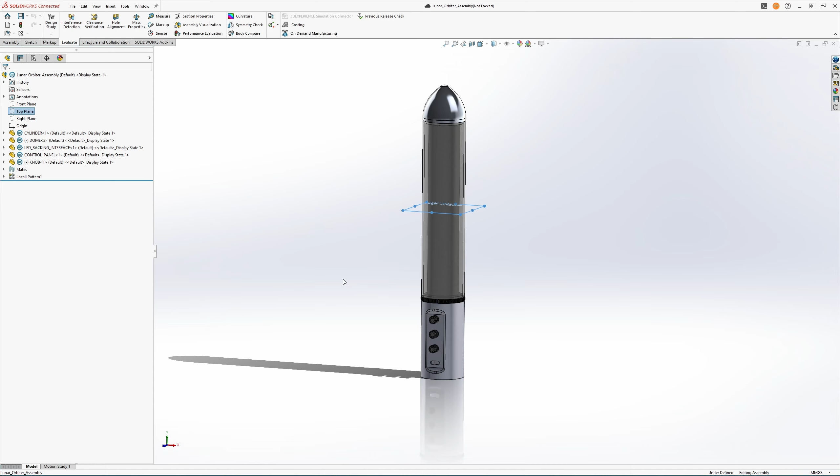All right, we're back in the project, and one of the first things to do before we go any further is just to make a sense of scale. We talked about this in the first video, but we didn't really do anything until now. Basically what I mean is we need to dimension our whole assembly to something that we expect in the real world. So we said that we're gonna do something like a 185 in diameter cylinder and about 300 tall. Let me just show you how to do that.

We simply just create a new part here, and let's just do it on the top plane. We want it to be about 185 - this is just like whatever you think that it should be. And let me just say midplane, should be about 300 millimeters tall, let's say. So this is what I would expect that the lamp should fit inside this volume, kind of. I'll just close that, and then I'll just rename this space envelope.

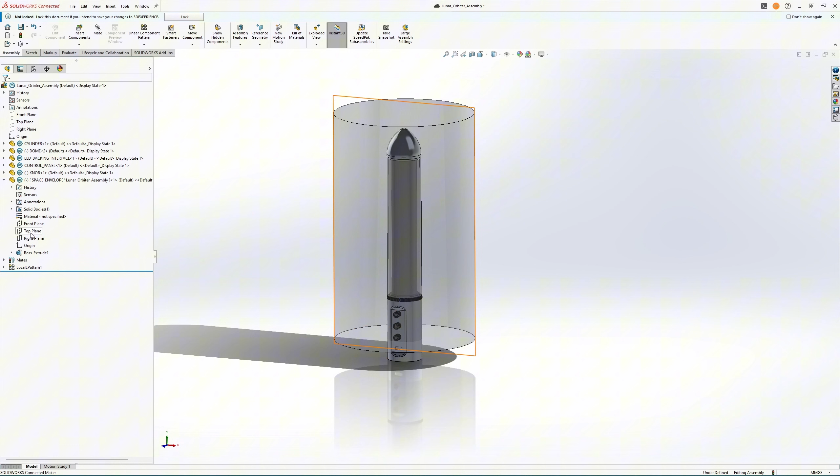So this is just like a visual guide for ourselves to say this is what we're designing for. It should fit within this. And we can see now already that it's probably going to be too tall, but let's try to just move this around a little bit so it fits, let's say there, there, and let's just move it about to there. So we can already see now that it's going to be too tall.

So let's just try to hide this for a second, and let's adjust this. Let's say instead of 185, let's just try 165, 155, something like that. So we took off about 30 millimeters, and we'll just do the same for this part. Here you can just write minus 30. So now we've adjusted that, and this is a good way to adjust your parts in the assembly context. You can make it a rough dimension, and then you can always fine tune it to your final design.

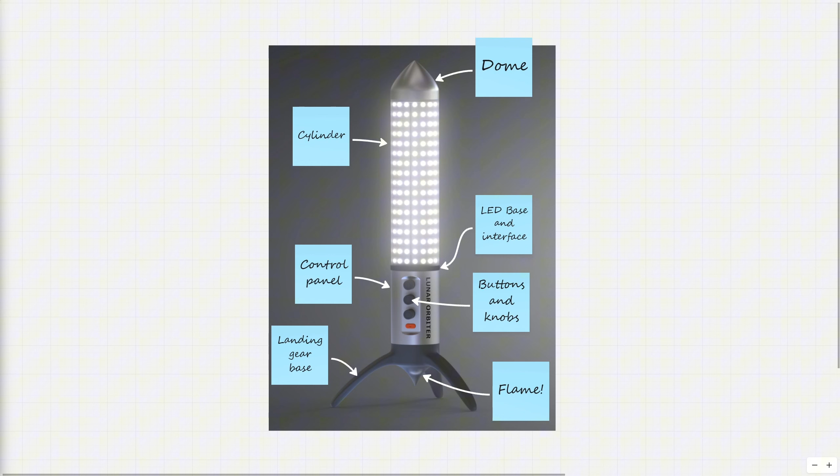All right, so now let's move on to designing the landing gear and the flame. Before we get into designing it, let's just have a quick look at how we would draw this up. Obviously I've drawn this already, but in your case, you might be designing a new product and you have a sketch or something like that. So try to just do a few sketches until you're kind of happy with where the design is going.

So for this one, let's try to analyze it for a second. We have a round part, and it has 3 legs, and it has kind of a shape that's repeated around the circumference of the part. If you were to take a cross section of this part that goes straight through one of the legs, you can see that it goes down, then you have a sharp point and it goes up again. You have some sort of curve, comes down, and it meets some sort of flat point which sits on the ground, and then some sort of flat point that goes up, and another curve goes up, and it meets the kind of cylindrical shape up here.

And our flame, we want it to be part of this part in a way. This is one way to show you how to do split parts, so we'll get back to that later. So let's get into it. All right, so we've created a new part here, and let's start with sketching on the front plane.

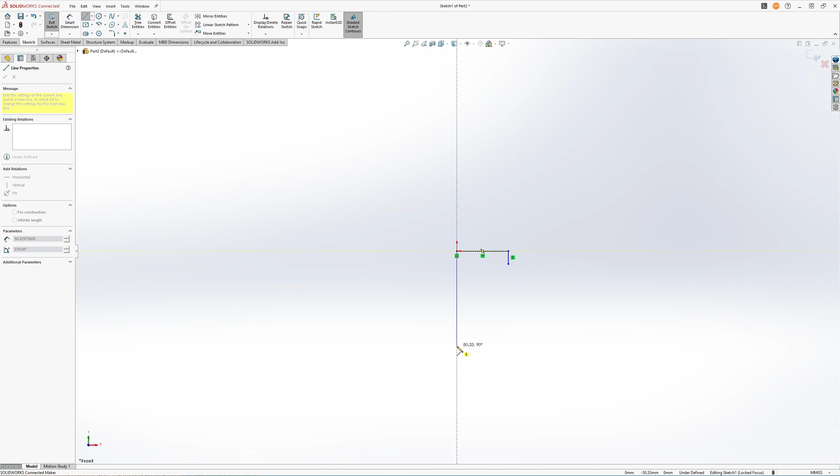So we know that we have some sort of round shape, a diameter, and we also know that it needs to go down into like a point where the flame is in a way. We also know that we want a flat part out here on the table and a flat part that goes up. So something like that. And SolidWorks, when you just draw like this, it doesn't have a sense of scale.

So the first time you put a dimension on it, it'll actually scale all the other stuff, and that can be quite useful. We said that the diameter of it should be about 185. So we'll take this one and say the radius would be half of the diameter, like that. So now you couldn't really see what happened, but it actually scaled all of the rest according to the dimension you just put in.

Let's put a few dimensions. This, let's say 3, and let's say 2. And let's say this should be the dimension from where it kind of interfaces with the other part, and the floor should be about 65, let's say. And then let's say up here we should have about 10 millimeters of part that comes down from the other part. And let's say that the diameter of this up here, I think we said 45 was the diameter, so we'll say like that.

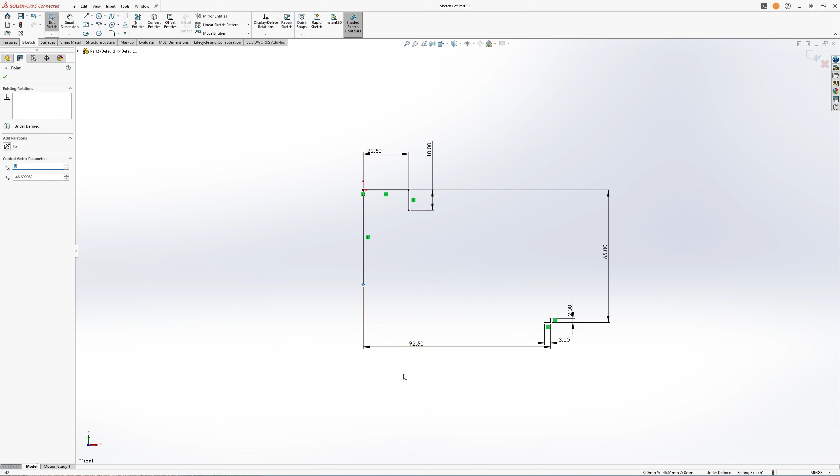And now we only have one point here that's not defined, but we need to have some sort of curve coming over here. So let's try to just use a spline, directly like this. So splines work as a line with some control handles, which you can move like this.

For this control handle, I wanted it to kind of come down and meet this line. So let's click on that and click on this control handle, and we'll say that these should be collinear. And then it's way too curved here, so we'll wind that all the way down like that. It doesn't have to be accurate—you can play with this later as well. Let's say something like that.

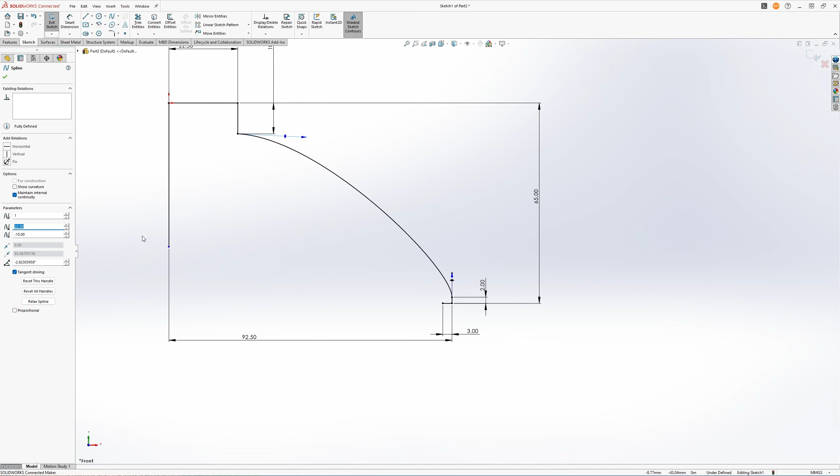And let's say this one has to go up first somehow and come down here like that. Actually, I'll just delete this point here and we'll just remove the handle instead. So something like this.

So I don't know if you can start to imagine it. If this is our rotation axis, this will be kind of like the leg shape.

Something like this. So again, we can just have a ballpark for now and then we'll come back to that later. Let's say about 50 for there. And you notice the handles here are still blue, and that's okay because you can adjust them and it's kind of hard to define. You can define it with the length and stuff, but it will be kind of arbitrary.

So I find that when you work with curves that are hard to define like this, you kind of just visually look at the shape and adjust. If you're working on a project where you really want to define it precisely, I would use a style spline, because you can then adjust the length and the dimensions of these guide lines. But yeah.

All right, so now let's try to revolve this. So now it found a line, but it's not the right line. Let's say we want this instead. Okay, so now we have like some weird kind of shape, right? But we can use this.

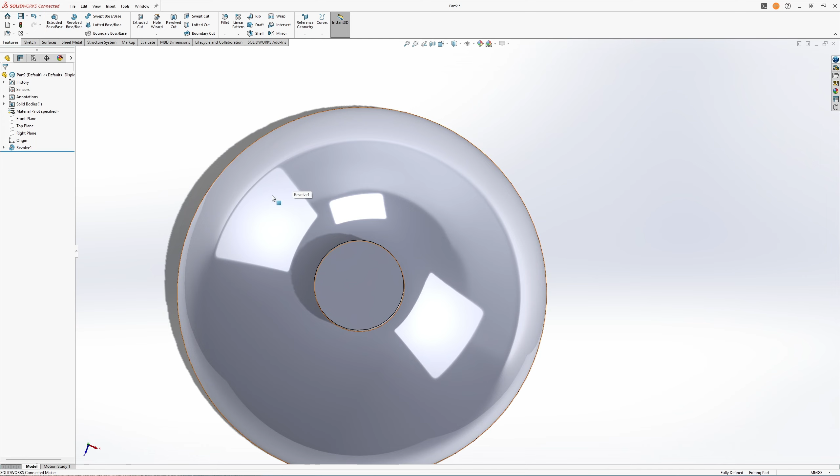And we only wanted 3 legs, so we can do a cutout for the rest of the material we don't need.

So let's try to sketch on our top plane here. I want the end of my foot to be kind of round, like this in a way. And we'll try to draw in the shape of the foot as seen from above.

We'll also use this center geometry as a guide. So we'll say that this should be co-radial with this. And let's use a spline for this here.

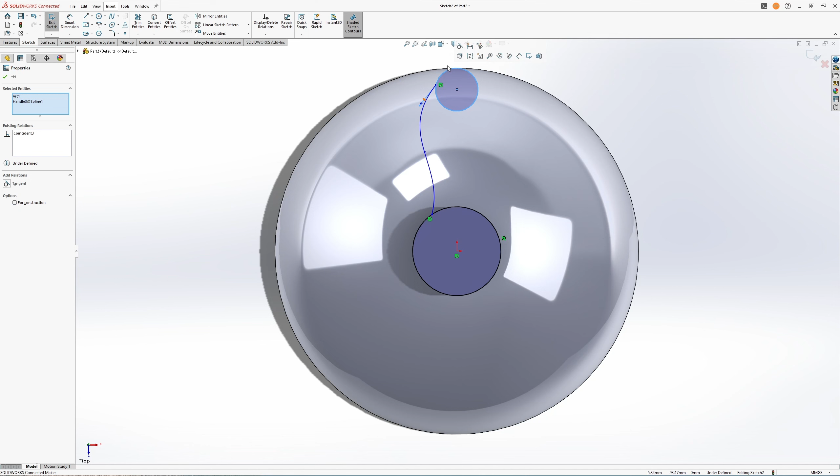We'll say something like this. And this handle here, we want that to be tangential to this. You see this snapped away from this, but we actually want this to be in contact with the outer radius—the diameter, sorry. So co-radial—nope, that's not it. We want it to be tangential.

Now it's starting to get messy, and that's because we're not controlling it properly yet. So we need to have some sort of control on this circle up here. I'll use a center line and get that into the center there, and we'll say that's vertical. And let's also give this a dimension so it knows—let's say 10. Yeah, it doesn't have to be much, just like that is fine.

And then let's say this handle should be something like this. Maybe let's try to just make it vertical. Yeah, that's all right. And then we'll mirror this one to the other side.

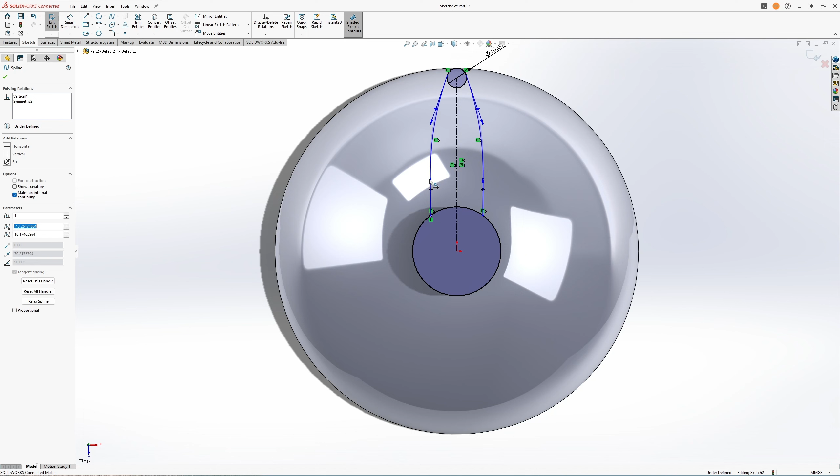This, and now I can kind of start to see the shape of it. I think it's looking a little bit wide for now. Say something like this, maybe something like that, a little bit sharp. And now we see we don't need these parts of the circle, so we can trim that away.

And then we also, so actually before we, yeah, let's try to copy this around because we wanted 3 legs, right? And let's try to do a circular pattern and 3. So now you can start to see that it looks like something.

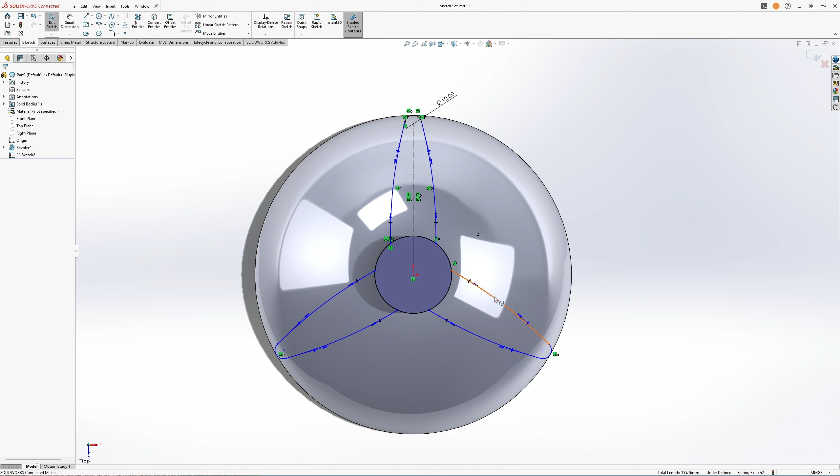Let's click OK. And let's try to imagine we're cutting away material, but we want to cut the material that's not within the envelope of the shape, right? We don't have an enclosed shape just yet because we have a line that kind of goes through here. So let's try to remove that.

Let's try to remove this. Trim it, trim it, trim it. And now you see you have an enclosed shape because it changes color to blue. And let's try to now do our extrude cut.

So let's try to go through all, and this is kind of opposite of what we want. So we'll do a flip side cut. And okay, so there we have it. That's the basic shape of our foot.

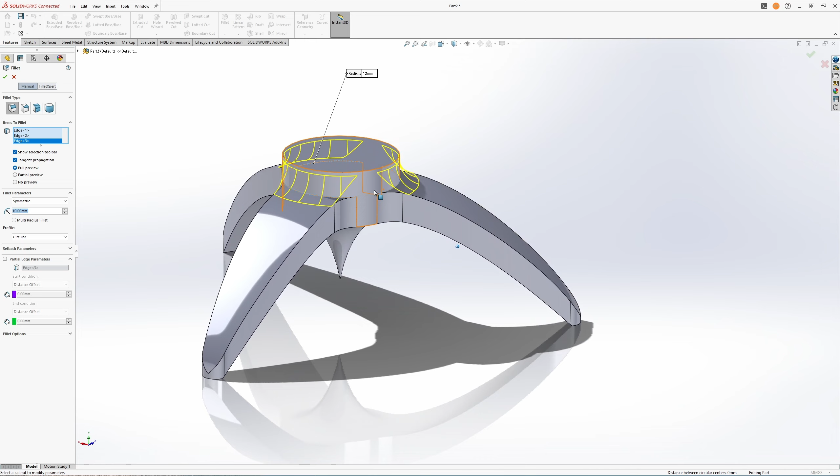And now let's try to clean it up a little bit. So we can put in some fillets here. Let's also try to build in some fillets here. I don't mind these being fairly big, so it kind of blends in with the other geometry.

And let's try to see if we just select the face here and select a small radius. It'll select all of the adjacent edges. Oops. If you find that it kind of selects lines in the back, what you can do is you can hold in Shift, and then it'll force it to select whatever's in front. That's a good tool sometimes, if you have a lot of lines in the back.

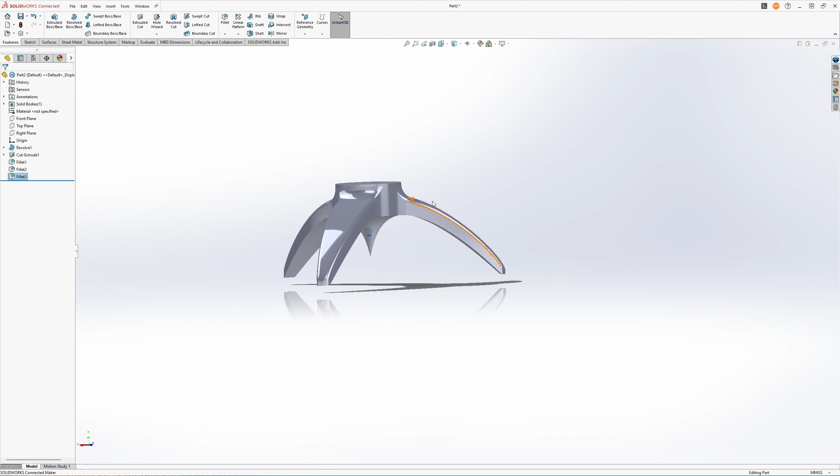So just change that to 3. Now let's try to turn off this so we can see. So it's starting to look all right, but I don't know, it's a little bit kind of not so natural, the shape there, I would say.

And one way to kind of analyze that is, let's go back to the sketch here. And let's go to this curve, show curvature. So here, this is a good little tool to kind of tell you what's the actual curvature of this spline is doing, or what is it? Yeah, so you see like it gets sharp when there's a very abrupt change in curvature, and we want it kind of to be smooth.

So do something like this. Can also, something like that. Not sure, like that. But yeah, that's one way to play with it as well. Something like that.

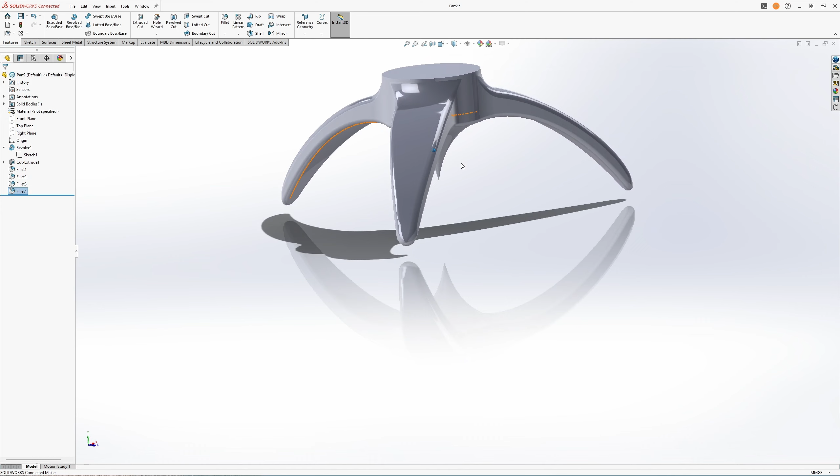All right, let's try to also get these down here. You see it kind of breaks our little flat bit out here, but that's okay because it still touches the ground at that point we want. And we're getting a smooth kind of rounded edge there. So this is starting to look all right, I think.

Now this point is very sharp, and that's probably going to be very hard to produce. So let's try to smooth that out a little bit. Let's say we want like some sort of a radius here, but should be small.

So let's just delete this one for now again. Let's backtrack a little bit. Let's say it should come down, meet a tiny little circle, maybe just 1 millimeter, maybe 2, 1.5, something like this.

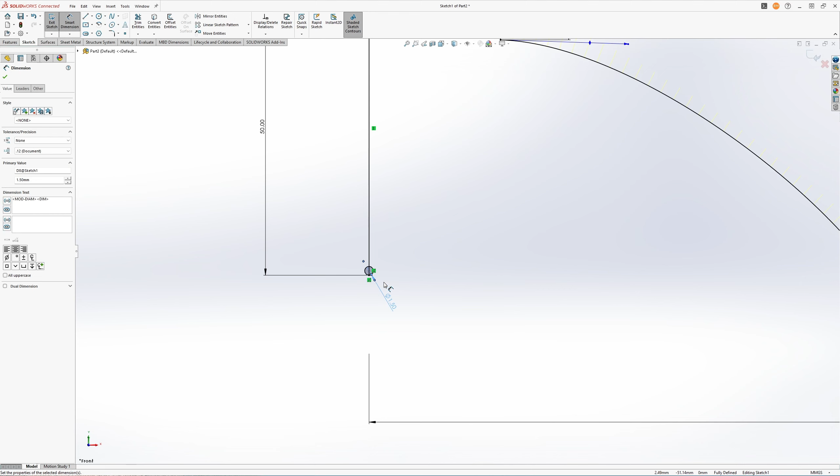Let's try to use the spline again. Come over here and make this one now tangent to this. And let's try to delete this one, get a more natural flow of the curve. Something like this. And now let's try to delete the stuff we don't need. Something like this, right? So now it comes down and joins like a more smooth kind of circle.

And that's going to be easier for the tool to actually do. Now we got an error because we changed this, we changed the lower surface, and now it can't find that surface anymore that we referenced. So let's just fix that. Let's clear that. Select it again. And there we go.

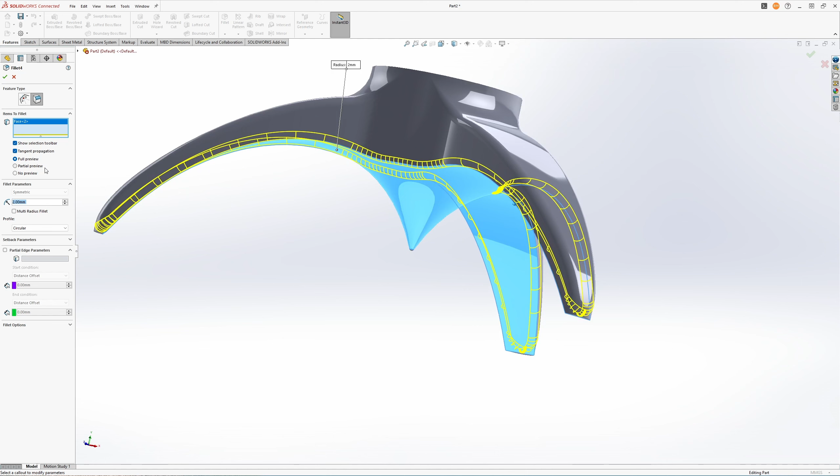Now it's not as sharp there. So let's just proceed to save this before we go any further. Okay, now let's proceed to bringing in our landing gear here into assembly.

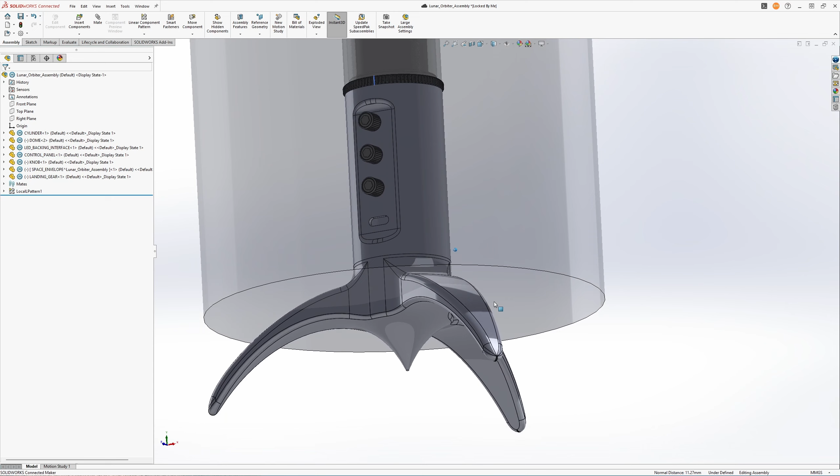Let's say this has to be made concentric to this. And we want this surface to match here. And let's just make this parallel to the front plane so that now it's fully defined. You can see already the lamp is getting too big, but we'll adjust that in a second. For now, we'll just hide this.

Another way you can hide it, other than just going up here, is to just hover your mouse over it and click tab, and that hides it. And if you click shift and tab, it'll bring it back. So it's also a good way to work with your model if you're trying to just look through it.

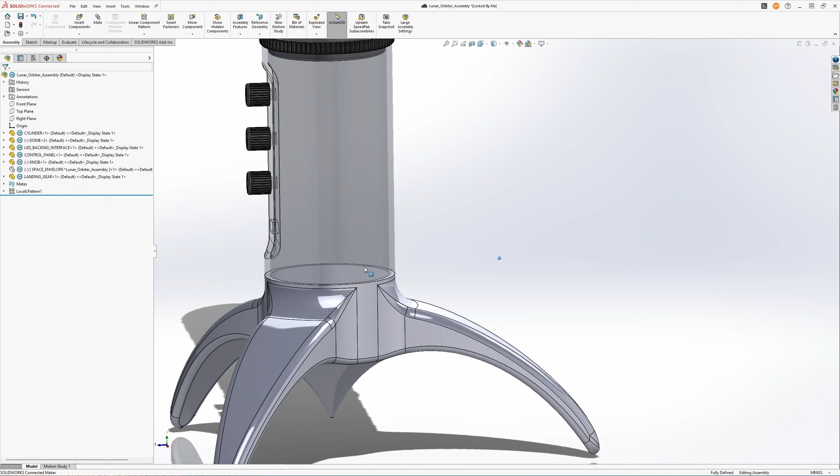Okay, so let's have a look at how this part would interface with the next part. You can change the transparency here, and now you can look through it. And we said we wanted to have something like a press fit kind of thing that comes up and fits into this kind of cavity. So let's try to draw that up. Let's go back into the part. And let's just make a center line first. And let's try to create that.

So we know that the wall thickness of the other part was about 2, I think. So let's say it should be about 2.1 here, just to leave a little bit of space for the parts to actually fit together. And let's try to do something like 2 O-rings that sit around this and it fits up into the other part. So I'll just need a little bit more space for that.

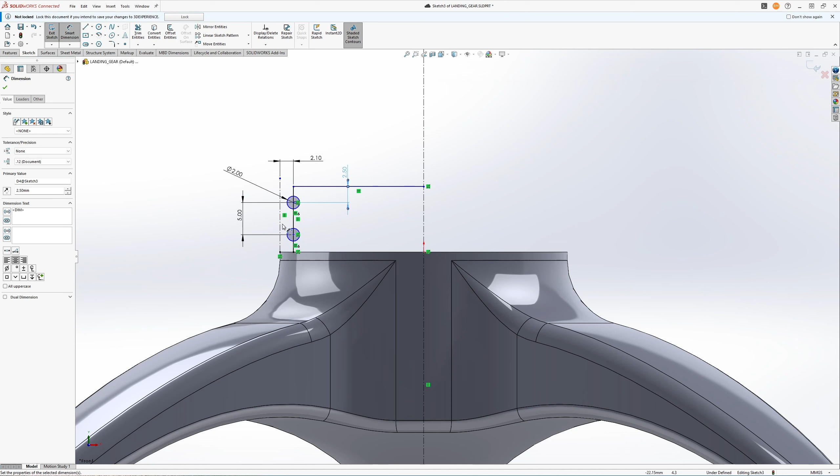Let's say we have something like 2 O-rings sitting there, right? And let's say a diameter of 2. Let's make them equal. And now let's say the distance between them should be, let's say 5. And let's try to find a distance from the edge here, say 2.5. And let's try to define a height here also. About that. And we just need a groove for the O-ring to kind of sit inside.

But actually looking at it now, this wouldn't really fit right because it would be too much interference with the part here. Let's try to redraw it. So I'll bring them back a bit. Let's say the O-rings would be 2 in diameter, so we'll just do 2.1. Our wall is at 2 exactly in thickness here. So we get about this much kind of interference, and that looks about right for the O-ring. So let's do that here, 0.85.

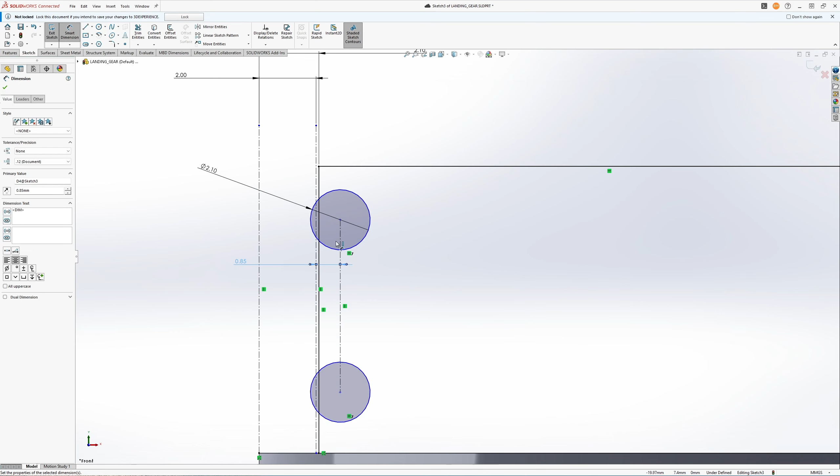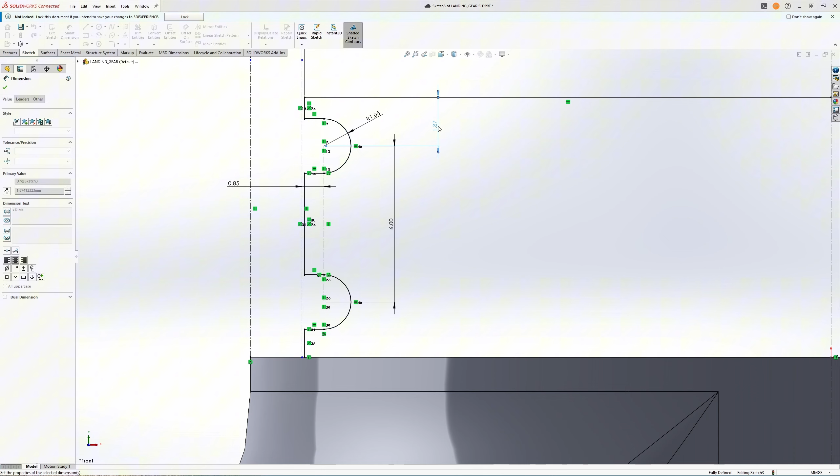And now we want a groove for the O-ring to sit into. So let's draw that groove. And there we have a groove for the O-ring. Let's do the same for this one. And you can see that they're blue, so something is missing. It's because it's lost the dimension we gave it because we cut that out. And we'll just make these two equal. Let's see what else is missing. So it's missing a distance between them. Let's say 6, and let's say that this has to be about 2 from the top. And so now they're fully defined, as you can see.

And to make it easier to have the O-rings come in there, we'll just remove these sharp corners here. And probably about half is enough. You can see how much it is if you change it up here. I assume that this part is 3D printed, so anything like this is easy enough to make.

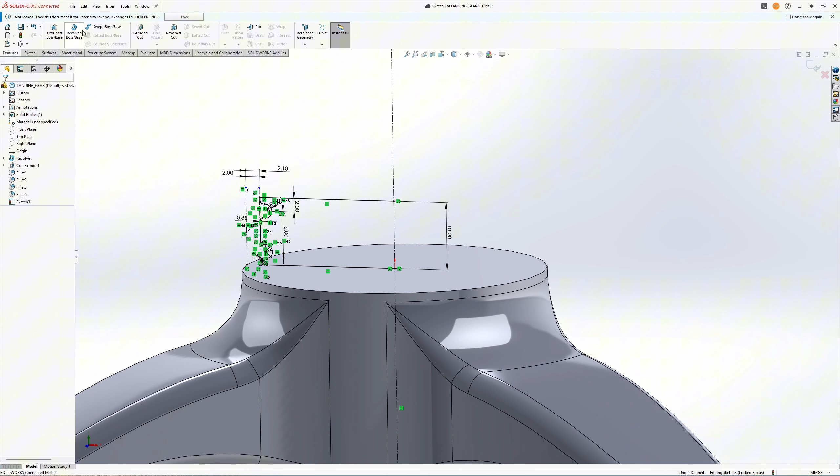So like that, and we still need a line in the bottom to our center of rotation. And now let's try to revolve that. And we'll select this axis. So there we have an interface with O-ring grooves. Round off this top as well. 5 is enough.

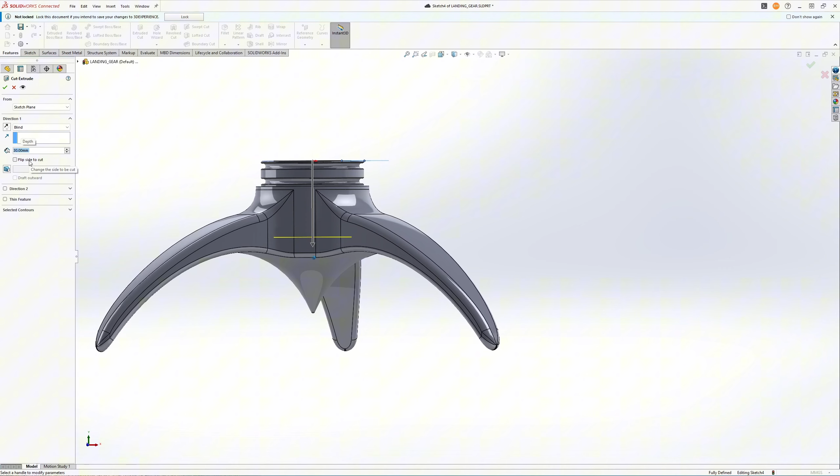And this is obviously still solid, and we want to cut away a little bit of the weight here, but we want this down here to be our flame part in a clear plastic. Let's first try to remove a little bit of material just for weight reduction. Say 30 is fine. Actually, instead of doing that, we'll just say that it should be some distance from the edge there. And let's say 30. Yeah, 30 is about fine. And let's just try to put a chamfer there. So now we've cut out a bit of the material, and it starts to look a bit nicer.

I'll just put it there. One way to look inside is to go up here and see it like that. So a part like this should be able to be 3D printed very easily. And let's try to change the material. Something like that. I'll just save it.

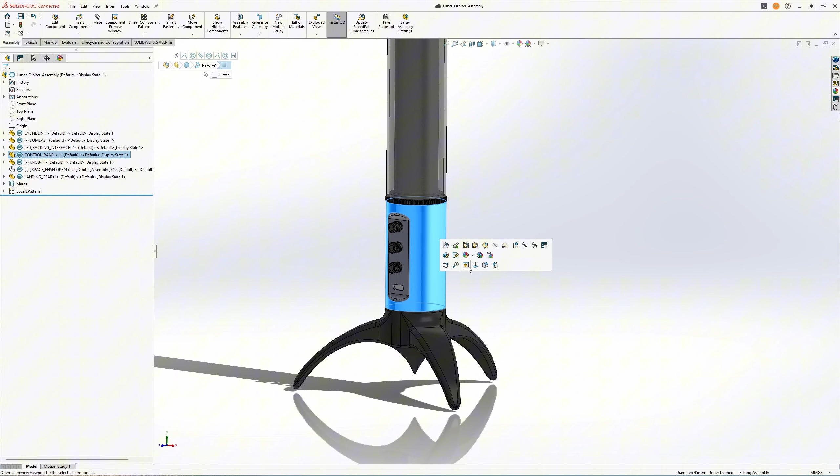Okay, now we are back in the assembly, and let's have a look at how this looks. So yeah, it looks pretty good, but we have some interference here, as you can see. So we need to make a few adjustments to our model overall. If we bring this back, you can see that it's too tall compared to what we wanted. So we have a few options. We could make the landing gear lower, but I kind of like that it hovers like this.

We could make the control panel lower, but it would kind of compress the buttons and make it a little bit more difficult. But I think there's room to compress it a little, so let's have a look at that. And then of course we can compress our LED panel, and that's just a trade-off. So you have less LEDs, but I think that'll be all right as well.

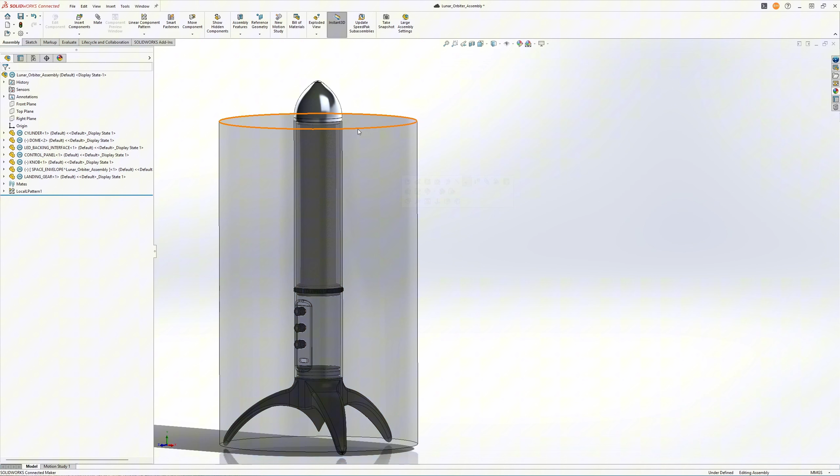And we can make this one shallow as well. And I think we could maybe take a little off, but it kind of looks nice as it is there as well. So let's try to start with the LEDs. So let's hide this. And let's try to go down to 135. I think we took 20 off there. And let's try to go into the other one again. Took 20 off.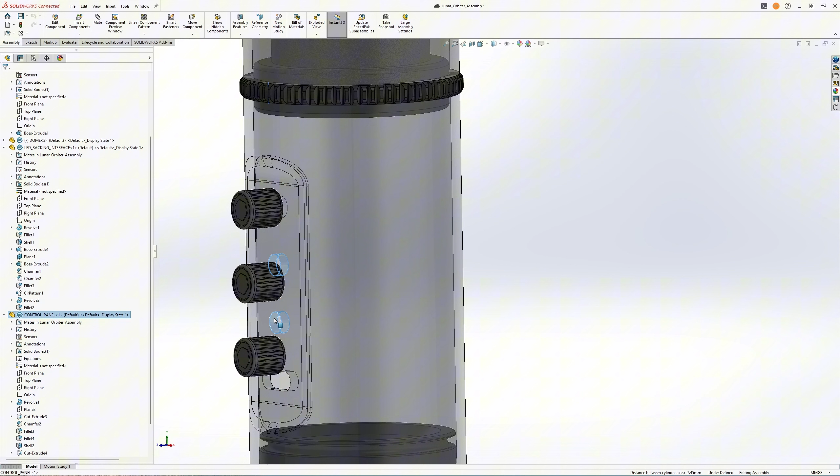I think that looks all right. And now let's try to reduce this. That's not gonna work. Let's try 55 actually. We just need to fix our pattern mate here. So let's just get the dimension of this. That's now 12. Oops. Collapse that. So that's actually acceptable, I would say.

And now we also can fit in the bottom there. Let's see how that looks now. So we still have a ways to go. So at this point, it's kind of a trade-off between the initial guess or how we would like the lamp to look like. And I would say it doesn't really matter that it's a little bit taller. I think I would rather have it a little bit taller and look well proportioned. So let's say that we keep it like this.

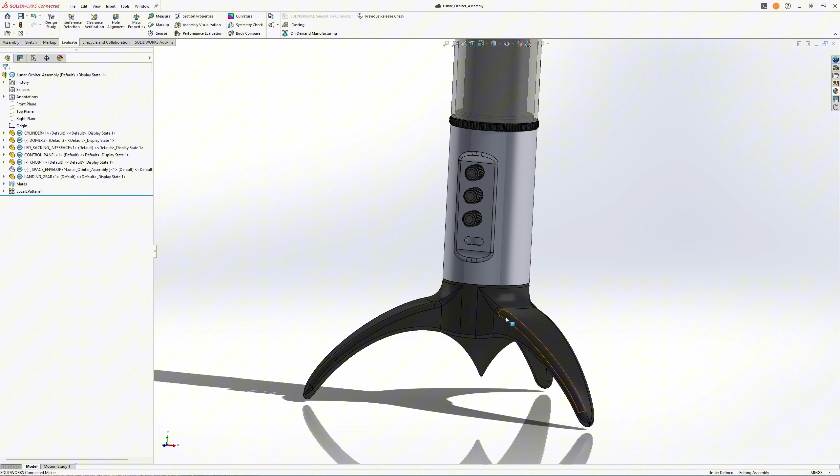Now let's try to move on to split parts. So split part is when you have a part like this, but you want to actually split it into two parts. And in this case, we were saying that we want to have the bottom be like a clear plastic so that we can have an LED inside that shines through and it'll look like a little flame. So let's try to do that. Let's move into this part.

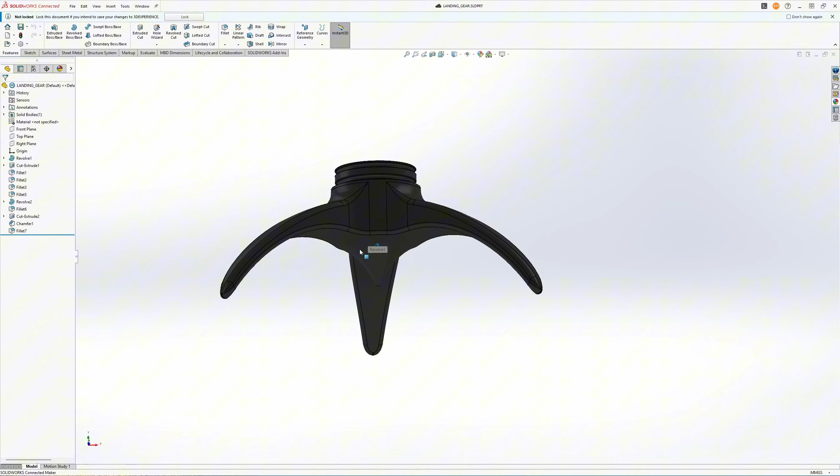And split parts you find up here in features, split, and it requires a drawing or sketch to work. So you basically can think of it like a knife that you cut through the part with. So let's try to think about this. We wanted to kind of cut through from above in a circle. So that's exactly what you do. We just move to the top plane here and let's draw a circle. Let's say we actually want it to be the same as this circle we cut here, so that later we can glue it in place.

Radial. And I'm kind of regretting the fillet I made there, so I'll just go back and change that because that's gonna make a funny geometry when we split the part. So by clicking twice, kind of slowly, you can rename it. Split line. And let's click on that and then click Insert, Features, Split, and Cut Part.

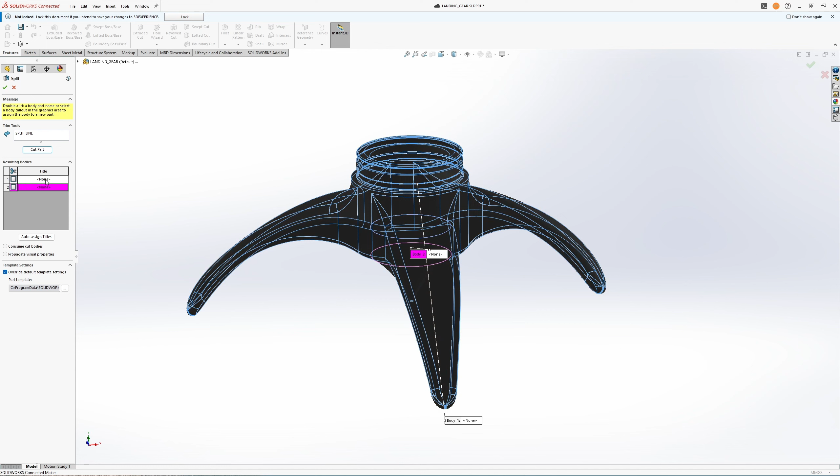And it'll come up like this and it'll show you where it's found potential split lines. And I would say that's about what we want. We want the bottom to be clear plastic here and the rest to not be. So let's say we want both of these. And this one, rename it the flame. And this one we'll rename, let's say, base. And then just click OK, and it'll go through and save those parts.

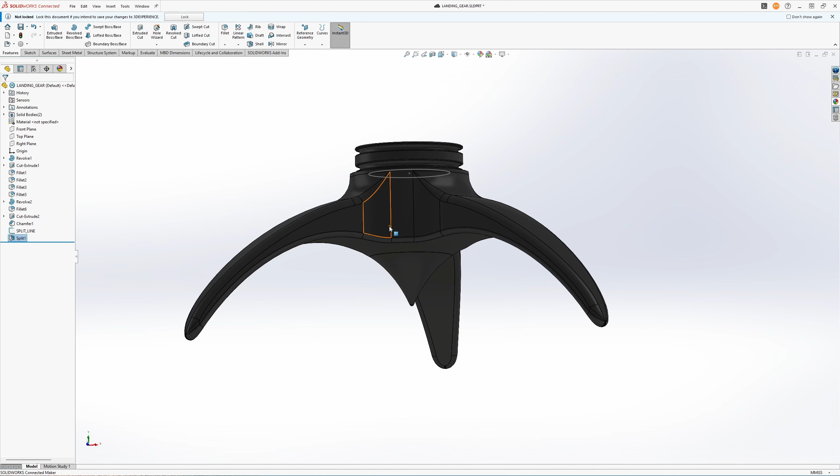And so when you make a split part, it'll create new physical parts, which are derived from a master part, so to speak. And it might ask you which unit of measure do you want to use. Just click yes, but you can change that later. So now we have it. So this has now become our master part. And now we have two sub parts. So let me just hide this and let's go back to our assembly.

All right, so just between takes here, I've already gone ahead and drawn up this button, and I'll leave that for you as an exercise to do. You should be able to do that by now. It might be a little bit difficult, but try to take your time and walk through the features and see if you can do it. I will show you quickly what the steps are, but try and go ahead and do it yourself. Extrude, fillet, and you can pause the video if you need to.

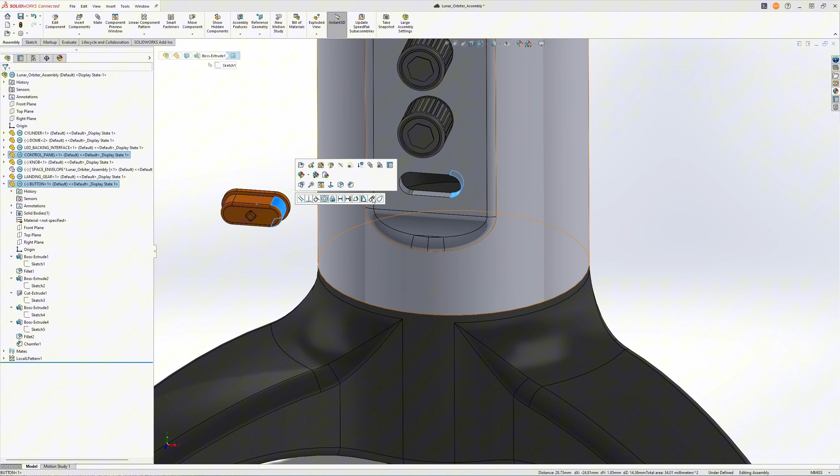All right, so let me show you how this mates. So you can do an elongated hole mate as well. If you go in here, select these two, start it there. And now let's say we actually want this to be moving in and out. Let me just correct this actually. Instead of a slot, we'll just say that it's concentric there and concentric here.

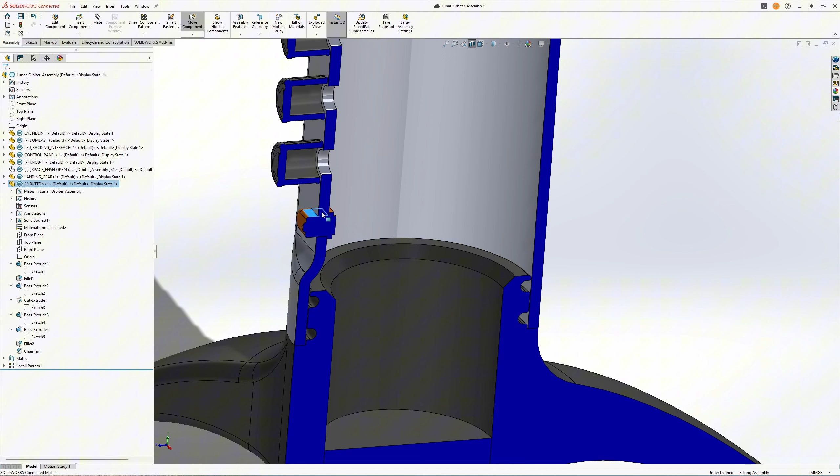And now we want this button to be able to be pushed in and out. So we want it to move kind of like this at a range. And you can do that with the advanced mates. So select the surface in here, select the surface, and then over here you can say a limit distance. And we say the smallest distance it can be is 0. And let's say we have an actuation length of 1.

Click OK. And now when you try to move it, you see it can only move 1 millimeter. So that's kind of how it will be in real life. And this helps you analyze how the parts will move in real life and if there's any conflicts with other parts and so on.

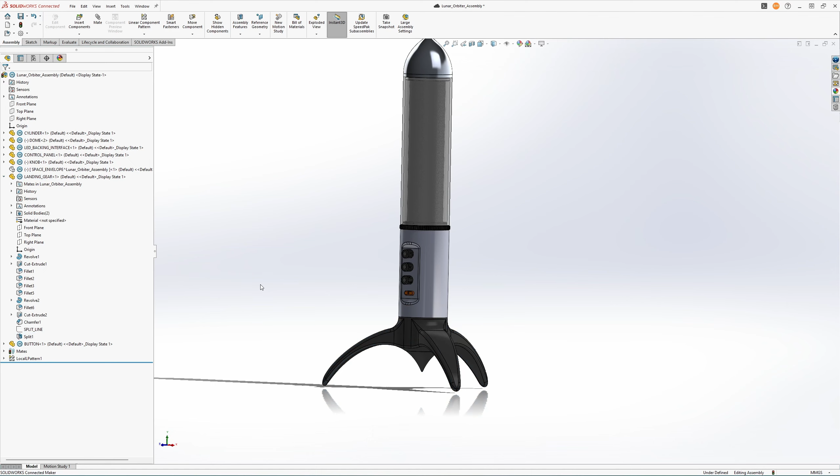Now let's talk about configurations. So we just made a foot with two parts in it. So we have a clear plastic part and we have a normal plastic part. So the part we have in here now is actually our master. This is the one that we split. Now we have the two new parts we want to put in here. But let's say we have two models of this lamp. We have one which has the flame, the clear plastic, and we have another one which has another foot, for instance. Or we have another one that has different colors or different dimensions altogether. You can handle that with configurations.

So let's say this is our no flame version. So you go up here in configuration, and these are the different configurations. So you can have master configurations and you can have child configurations. So let's say you have a configuration which has a certain color, but that one has a different landing gear or so on. You can kind of make them related to each other in this way. But here we'll just say it's completely new because it'll have a different foot. So we'll say with the flame. Okay. We can go in here and say okay.

So configurations work with states of the part. So if you have it suppressed or you change the material, stuff like that. So let's try to put in our new foot here. So this is the one with the flame. And we say we don't want this one to be in this one. So we'll suppress that. And you can't delete it because it's still needed in the other configuration. So let's go have a look at the other one now. So in this configuration, it's not suppressed. But if we go back to our flame, it is suppressed.

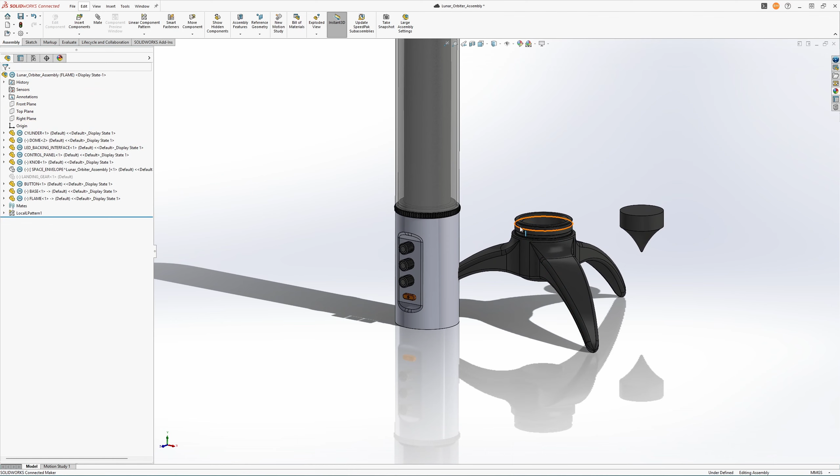And now let's insert our landing gear. Oh, sorry, base and flame. I'll just put them here. And we'll give it the same mates as before. Concentric. The surface mates with the surface. And we'll just say that this is front plane to front plane. And this one. So you have multiple options here. Because this part is derived from this part, they will have the same origin. This origin and this origin. So you can just mate those two origins in this case, and it'll come back to that.

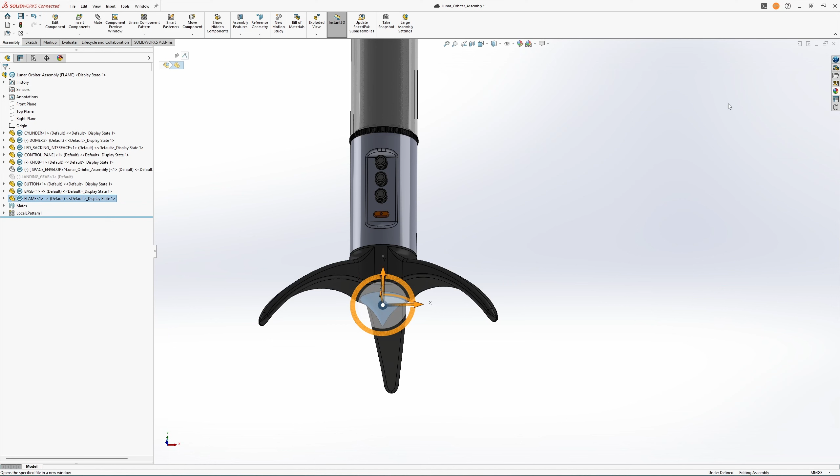And now let's go try to change our flame to a clear plastic. Clear, let's say it's frosted. And now let's go back to our other configuration. So in here, it actually inserted these new parts, but we don't want those in this configuration, so you can suppress those. And now when we swap between these configurations, you'll see it looks more or less the same, but actually it suppressed the landing gear in this one. And in this one, it suppressed these two new parts we put in. So that's how you can work with configurations.

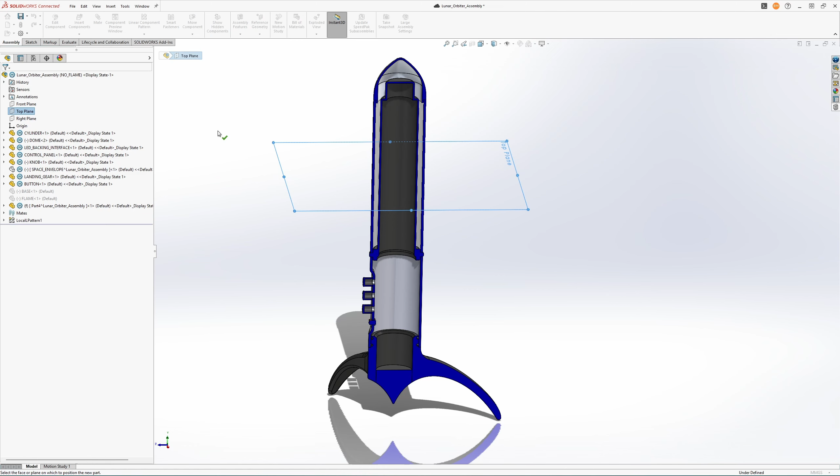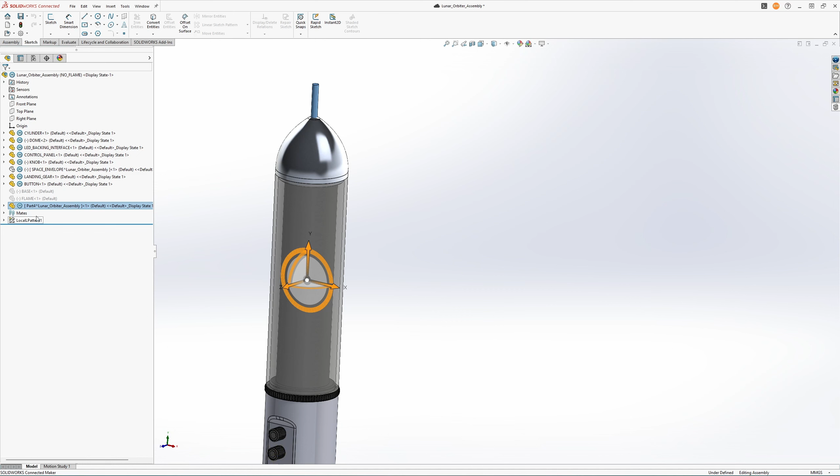Let's quickly cover the assembly process. If you remember from the first video, we talked about how we wanted a threaded rod to go through and hold it all together. So let's try to draw that up really quick. Create a new part in our top plane. And let's say it's an M4 threaded rod. So 4mm. Let's see if 200 is enough. Let's say 250 for now. And let's just go back here for a second. So I wanted this threaded rod to screw into the top here. It's drawn in place.

Let's quickly talk about axes for a second, because this is a round part and I want it to be in the center, but I want to be able to drag it up and down right now while I'm thinking about how I interface it up there. So you can click two planes, for instance, and these two planes will intersect at a certain line in space. And I want to define that line as an axis that I can use. So you go up here and click Reference Geometry, Axis, click OK. So now in my assembly, I have a center axis. Now I can use this axis to define that. Let's just click View so we can see.

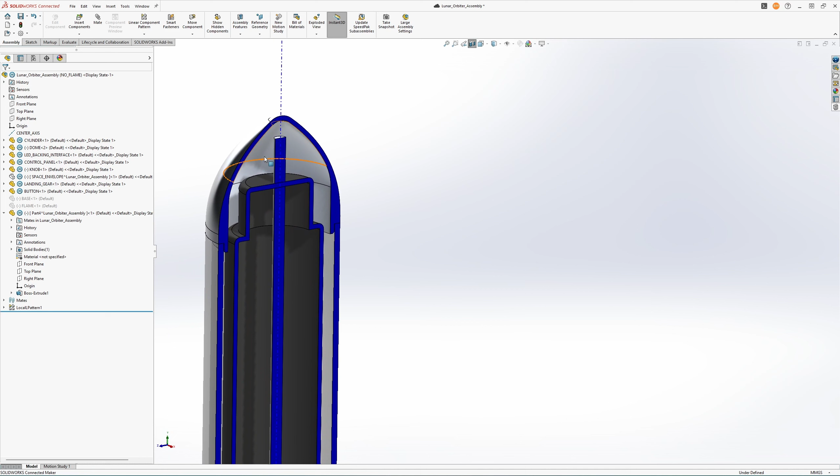There, center axis. I want to define my center rod to be on this axis, concentric. So now when I drag it up and down, it'll follow that axis, but it won't be defined at a certain length just yet. And that's fine, because we need to have a look at this. So yeah, I want it to screw into the cap here at a certain distance, and I want this to be supported to my cap somehow. So let's just open up this one.

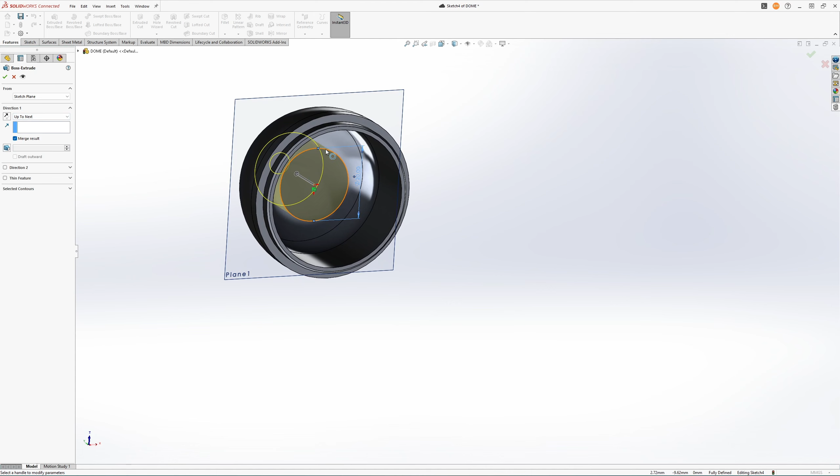So we need to create some sort of surface, mating surface up here. So what I just did there was click the top plane and I hold in Control while I drag. It'll create a reference plane. And then we want to see it from the bottom so we can see what we're doing. And let's just create a, something like 20mm will do, and extrude. And we'll extrude until next. So this will extrude this circle up until it meets geometry, which is what we want.

There, now we have some material we can use for threading our threaded rod into. I'll just put a fillet here to make it easy to machine. And I'll just round this off as well. And now let's talk about the hole wizard. It's up here. And this is useful for whenever you want to create a hole that's specific to threads or screws or dowel holes or just standard drill holes. Anything special, basically. In this case, we want a threaded rod. So we go up here and click straight tap.

So you see here you have a kind of counterbore screw or countersunk, or this is just a normal hole for drill, and so on. So these are very useful. And you have different standards here for the different fasteners. I know that I want to use a DIN, and it's a tapped hole, bottoming tapped hole, and it'll be a M4. There, and in position, I want it on this surface, and I just want it in the center. And basically, it just uses the point in the sketch.

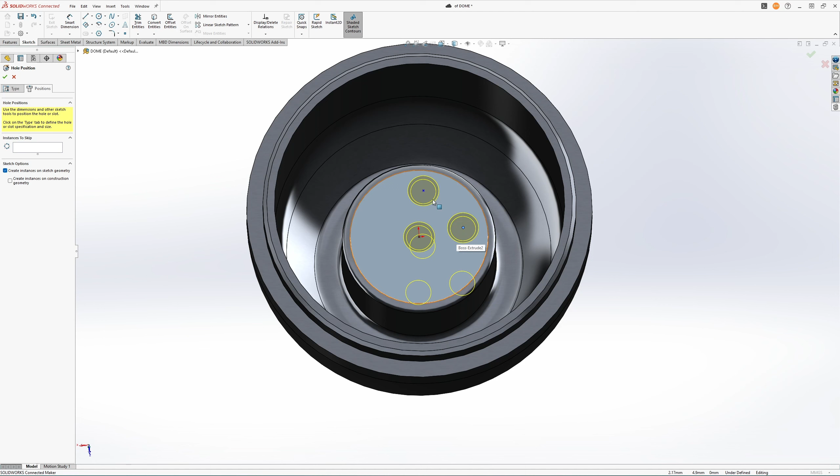So if you were to click escape here, if you just click point again, it'll come back and it'll do a new hole there. And just a tip, if you drew a rectangle, it consists of a point at each corner and in the center. So it'll actually treat that as you want the holes there. So that's just something to be mindful of. If you didn't want it to do that, you'd have to delete the points and so on. So just if you encounter that and you're wondering what's happening.

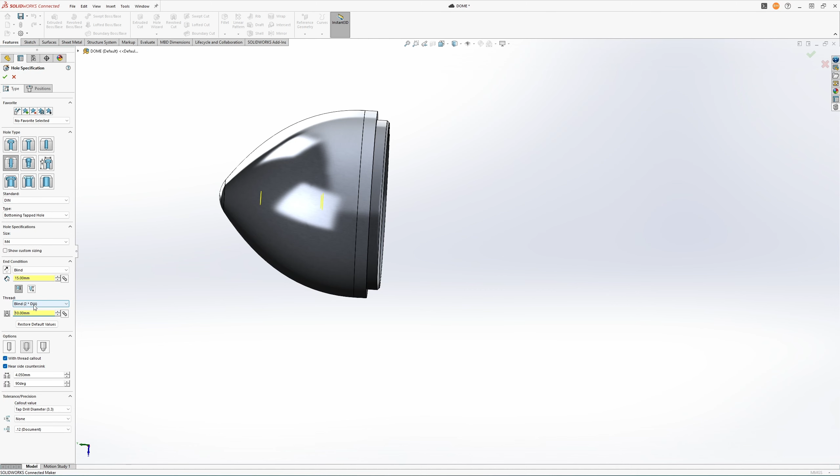Now go back and let's see. We don't want it to go all the way through, obviously. We want it to just have some depth. Let's say 15. That looks about right. And 10. So this is the depth of the hole, and this is the depth of the thread. And usually you want about two times the diameter, at least, so I'll choose 10, that's fine. And it automatically creates a chamfer for the hole, which in manufacturing makes it easier to tap the hole. You can control that down here.

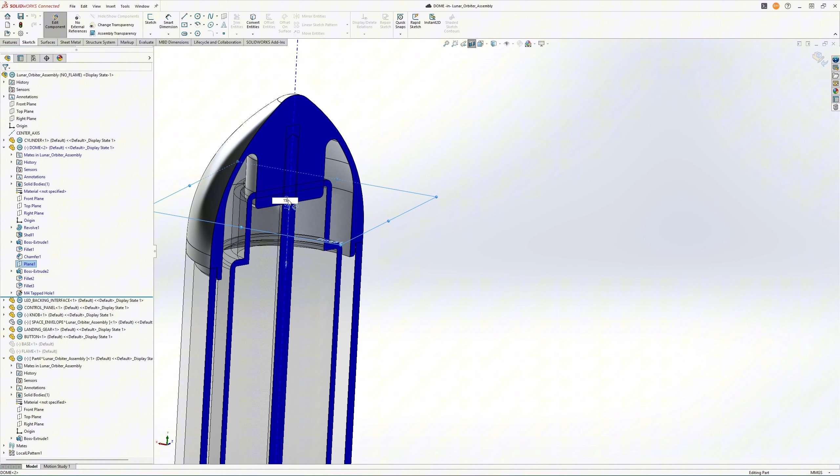Okay, so let's save this and go back to our assembly. And now you can see it's gone, and that's because you just need to refresh. There. So we just need to move it back a little bit. Let's first measure how far back. So I'm holding down Shift to get this surface here, and Shift, hold the surface, and go up to Evaluate, Measure. So 4 millimeter we need to move this back by. It's kind of hard to see where that dimension is, but we can just go in here. Oh, it's hiding in there. So we drew it from a plane, so we need to move the plane 4 millimeter. Like that.

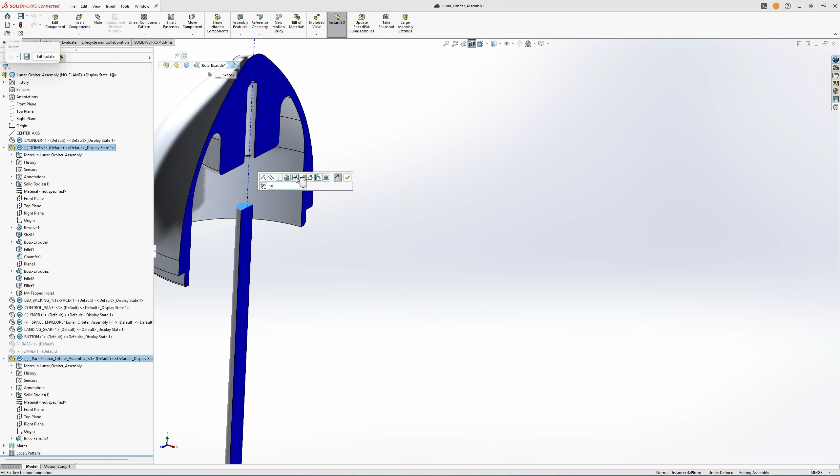And I want to have the end of this threaded rod about 10 millimeter into the thread. And it's kind of hard to get in and hit the surface now of the cap. So what you can do is you can use isolate. So you just click this and you click your threaded rod, the two things that you want to view just now, you right click and click isolate. So that'll just isolate the whole assembly by those two that you've just selected. So that's how you can work in an assembly context with just a few parts and make it easier to manage. So I'll select these two surfaces and say I want it 10 millimeters in, but the other way, like that. And now you can go out of the isolate again.

So now you have it go through there. And we see here there's a conflict. Let me show you something. If you at any point want to check if there's a conflict like that, we already saw it up there that this part interface is interfering with the threaded rod.

You can go up here to Evaluate, click Interference Detection and click Calculate. And it'll go through and see, okay, where do we have interferences? So that's interesting. It's pulling up all these, and that's because we've made a space envelope. Let's suppress that for a second. Let's try again. So now we see there and there.

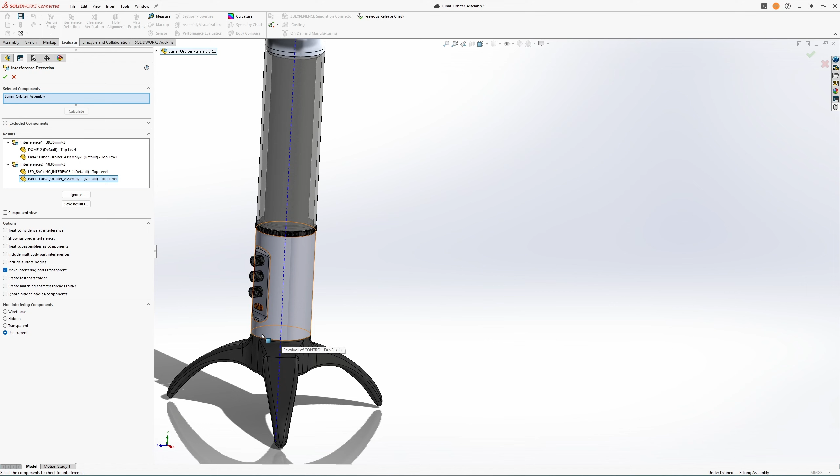So this interference, it's saying that we have interference in the top cap and with the threaded rod. And you can see that here, these two parts. But that's normal because you want that material to be drilled out when you actually do the thread in real life. So that's okay. And it also says we have it between these two parts. So that's what we saw before. You can use this tool to find out any mistakes or interference that you might have made and you might not have seen. So this is a very important tool to analyze your design.

And now let's try to see these two parts here. Let's just rename this first. Threaded rod M4. And I want to see this and the plastic part that we want to work with now. So I just select these two and then click isolate. Now we can see here the threaded rod is interfering with this part. So let's make a hole in this one. Click edit. Actually, let's just go back from this one. And let's say we want to have an M4 clearance hole.

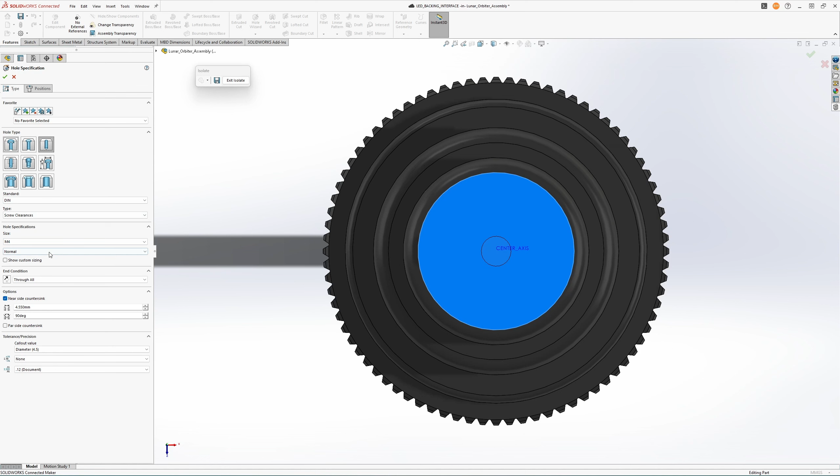So we go up here in Hole, and DIN, and we want a screw clearance of M4. So what it does here is it automatically has tables of hole sizes, which are standard. And so it saves you a lot of time trying to look up tables to find out what the hole size should be for M4. It just knows. And you can go in here and click which tolerance you want, like if you want the hole to be really close or if you want it to be very loose. That's how you decide that there. But this would be a hole that fits M4 with a normal kind of tolerance. It goes through all of the material, which is fine for now.

So now we have a hole for this part. Click exit and just collapse this. And let's try to run our interference detection again. And now we only have this up in the cap, which is fine. So you can just click ignore if you want. Great, so now let's have a look at it again. So the threaded rod is now threading into the top here, and this one meets the part here, and this part meets the outer cylinder in this joint. That's fine. And it goes down here and meets this joint, so these are compressed.

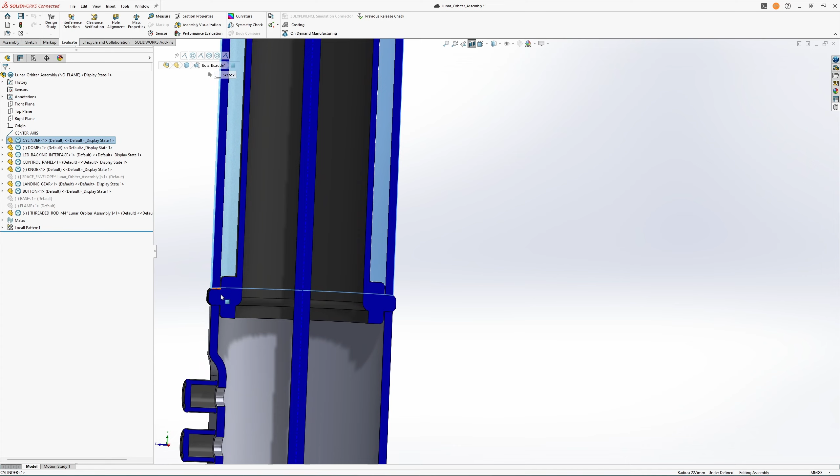So maybe actually you would want to leave a little bit of space between these two parts so that when you are compressing it, it'll compress the outer shell here also. But yeah, that's engineering thoughts. So now we need some sort of surface here to actually put a nut on it so we can tighten it all together. So let's try to isolate these two parts now.

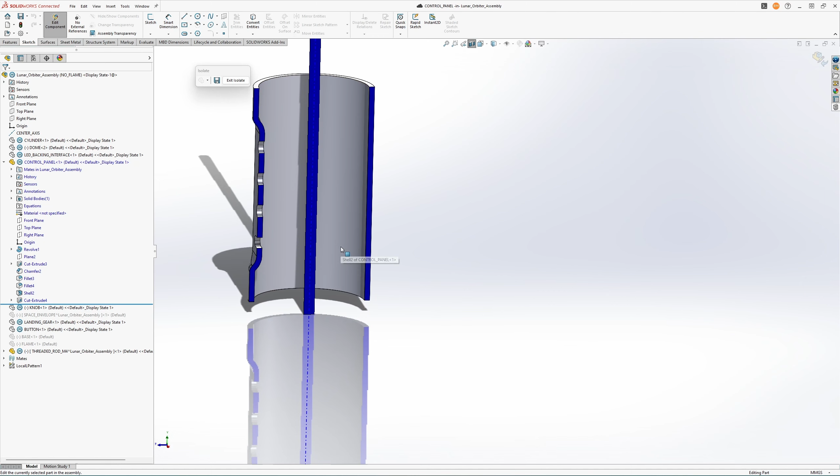And now let's try to go into this part. So I want to have kind of like a surface where I have a hole in it where I can put a nut on the other side. Let's just go back here a second. And let's have a look if we can actually fit that down there. So we could fit that if this was a little bit smaller. So let's just try to do that. I'm going back and forth a little bit, and that's how the design process is. Sometimes you need to tweak things to make things fit. So let's just ignore that for a second and go back to this.

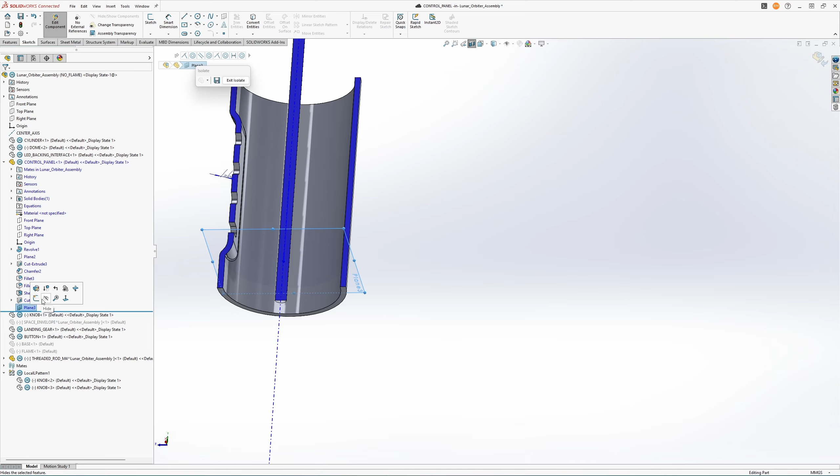And now let's try to edit this part. Let's make a plane around there. So I click the top plane and hold down Control and drag, and then 30 millimeters. Now I want to use this geometry for my new sketch. So let's do a new sketch in here. It normally takes you to the normal of the plane when you're drawing by default, but I like to kind of draw in 3D sometimes.

And let's see if we can get this surface in here. Intersection curve for this. There, so it's found that circle there. And let's say we just want to extrude that up by 1.2, should be enough for now. Yeah, we could have actually drawn the hole there at the same time. If you know what the hole size is, you can also just do it like this. And this is M4, so we'll just say 4.2.

Whenever it disappears like this, just refresh and see if it will come back. Usually it does. And we'll just fix this up a little bit, say 2 millimeters like that.

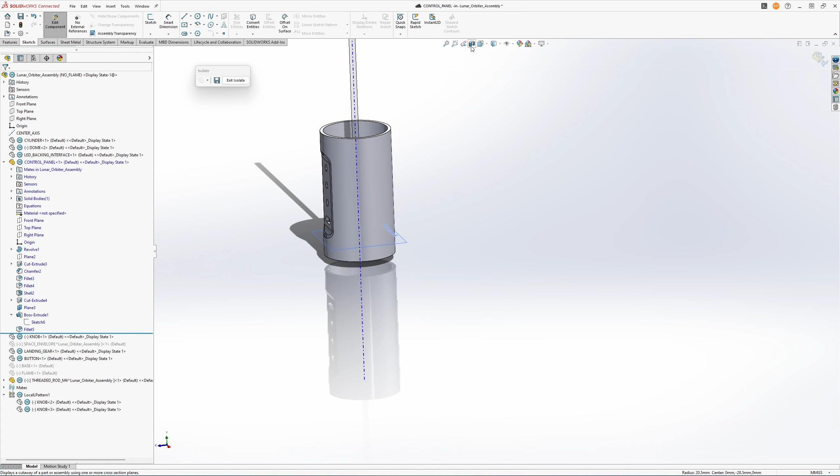That's good. Now let's exit this and exit our isolate. Let's go back to our part here. So now we have a threaded rod that screws into the top, the parts go together, and we have a base down here. So if we put a nut here and screw it together, it should hold all the parts together, which is what we want.

And that leads me to show you Toolbox. So if you go over here, it'll look like this when you first open it up, and it'll have something called Toolbox. That's basically a place where you can get all kinds of fasteners and stuff like that, and it's very useful. I usually work in DIN, and let's try to bring in a nut for this threaded rod here.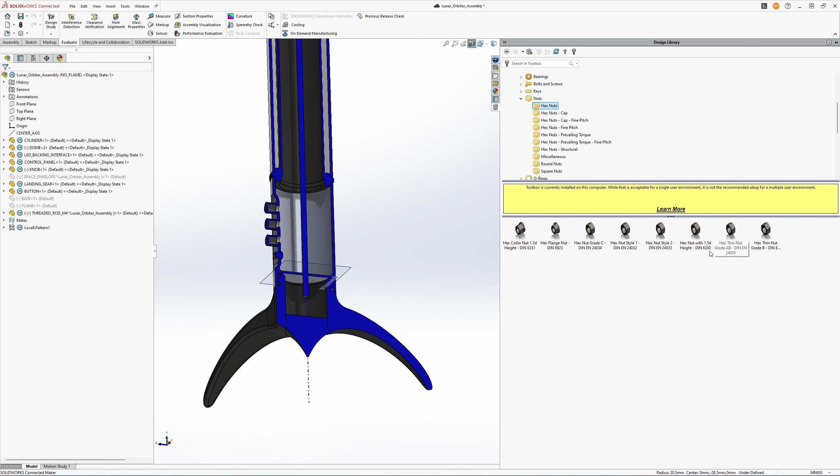So Hex nuts, looking for just a standard bolt, but you can find whatever standard fits you. Just drag that in. If you don't see it like this, it's because we are in a section view. When you drag in new parts in a section view, it won't show them until you refresh, or if they're on the other side of that section view.

So let's just go back to scratch for a second. There. And it should be a M4, so we can't do that with that standard. Let's try to just do normal ones. So this one has M4.

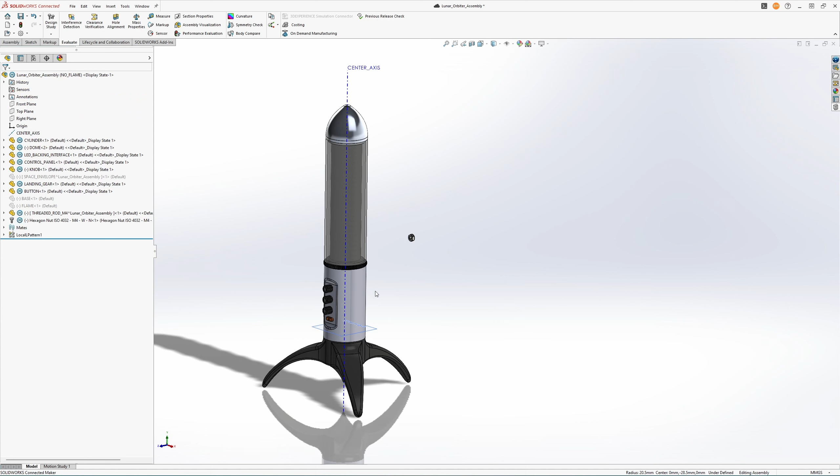And you can also add washers and all that kind of stuff if you want. So now it's kind of hard to see right in there.

So again, let's try to use our isolate. So we'll take that. So sometimes it'll bring in the part at a very weird location like this case, and sometimes you even lose the part. So a tip for that is just bring it back to origin for a second, mate it with origin, and Control 7, and it'll usually pop up there, and just delete that again.

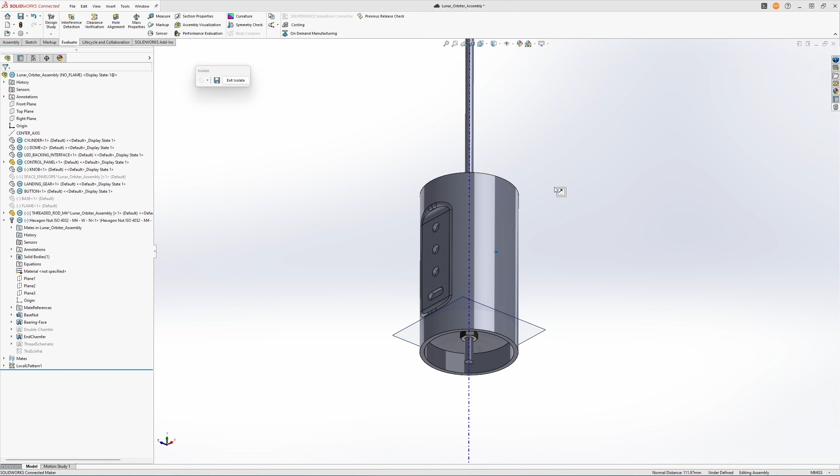So then you have it here where you need it. Let's make this to there. Get this, because we want the surface to be on the bottom there. And now we can edit this even in this view. We don't need to see the rest of the part for that.

Okay, exit. Right, so there we have it. We have the assembly process also implemented now.

Okay, so before we export this to SolidWorks Visualize to make some renders, I'll just want to add a LED panel so we can use that in our actual render. So let's start by just isolating this part we want to work on.

And I want to create a new part here, which is a LED panel that goes around the circumference. Let's click a new part here and just make it on this surface. And we'll just use this circle here as a reference. Convert entities. And we want it to be split.

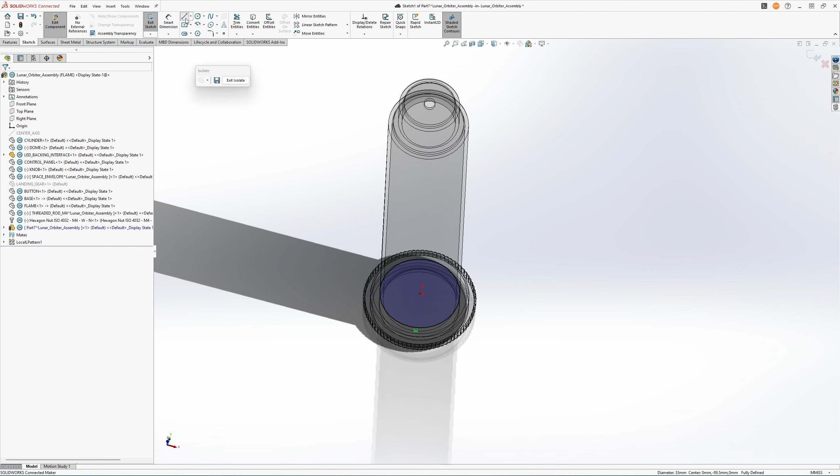So we want the LED panel to be split by some gap. So I'm just drawing up the gap I want to kind of cut out. Let's say 5 degrees would do. And I want it to kind of be in the middle of this.

And let's make these into construction lines in a second. We'll just cut out these two here. We'll make this into a construction line. There, so now we have a circle that doesn't go all the way around, but it kind of is cut in a section. And we can use this to extrude a surface.

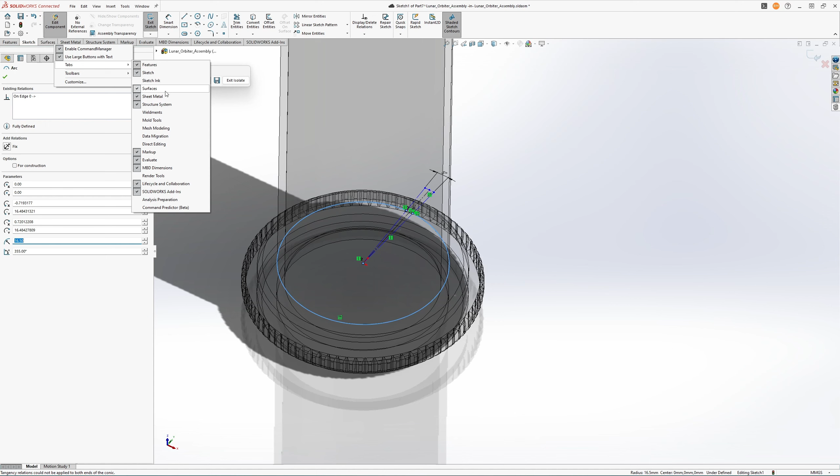So you have a tab up here called surfaces. If you don't have that, you can right click on here and click tabs and surfaces. And here just extrude. A surface doesn't require a closed shape, it just requires a line, and we have that here. Let's just write a number and see what it looks like. That's too much.

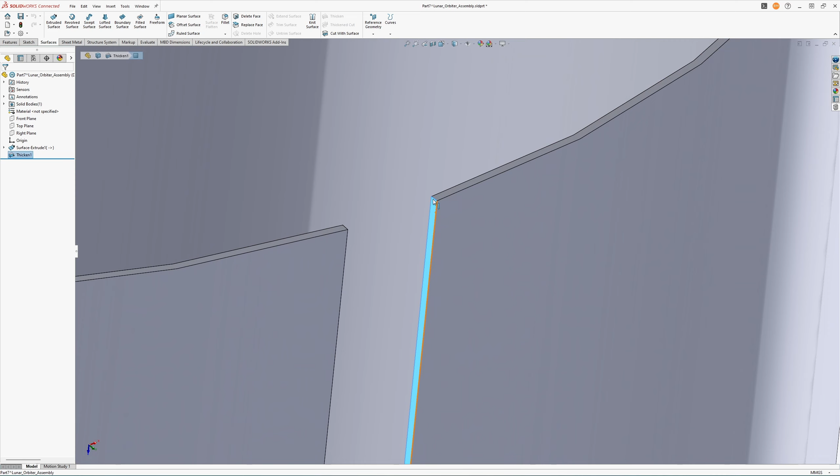And now let's try to add a LED to this. I'll just open up this part on its own. This is how we have like a little panel, just around these corners. Let's say 2 millimeters. I'll just click this one because then it'll take the other way. Yeah, so I'll take the other side. About 1 is fine. Okay, now let's try to make an LED.

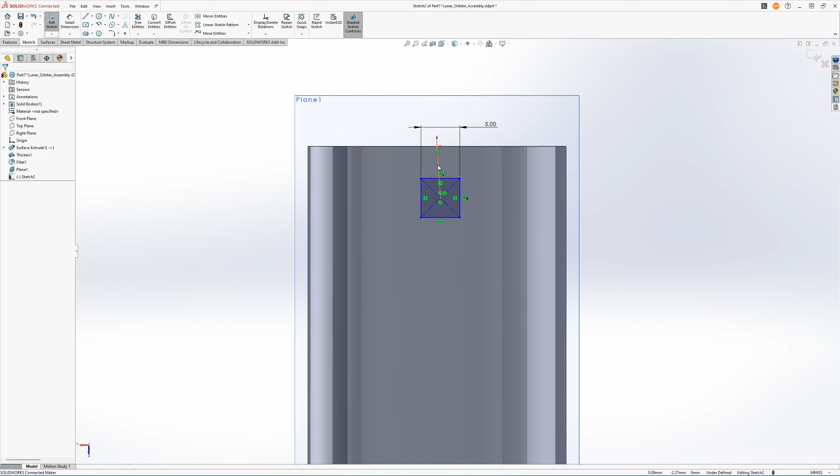So I'll just create a plane that's tangent and parallel to the front plane. And let's try to just draw one here. So we'll probably be using something like a 5050 LED, so that's 5x5. And let's just make that centered there. And let's say it's about 3 from the edge. Let's extrude this.

Let's say it's about 1. And then direction 2, up to the surface. And let's try to just draw a little LED in here. So I want it in the middle, so I'll just draw some guidelines here. Extrude that, let's hit 2. And sometimes it doesn't select, even though you have drawn it. You can use this selected contours, and say blind to there.

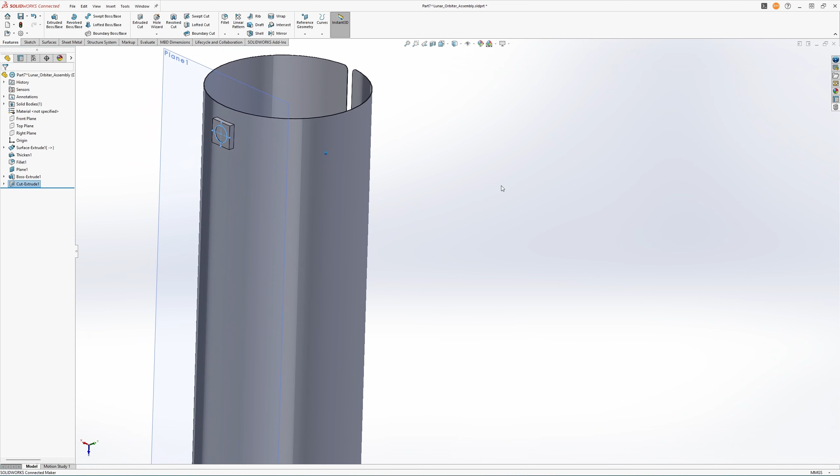Now let's make this our LED. So we go up in appearances and click lights, LED, white. And we'll make this one a black kind of plastic. Maybe a lot more like a cream color kind of plastic. And we'll make these surfaces like a soft touch green, kind of like a PCB.

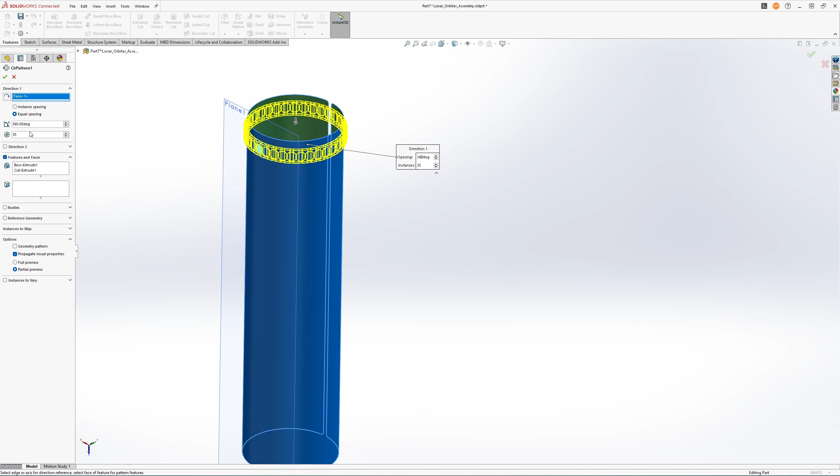And we will then pattern these radially. Say 10, 8. Let's pick an uneven number so that we have them kind of like that. Let's add it up a little bit. 18, that's too much, isn't it? 15 is too much, let's try 13.

And let's try to pattern these down the length of it. Use the scroll wheel here as well. Something like that.

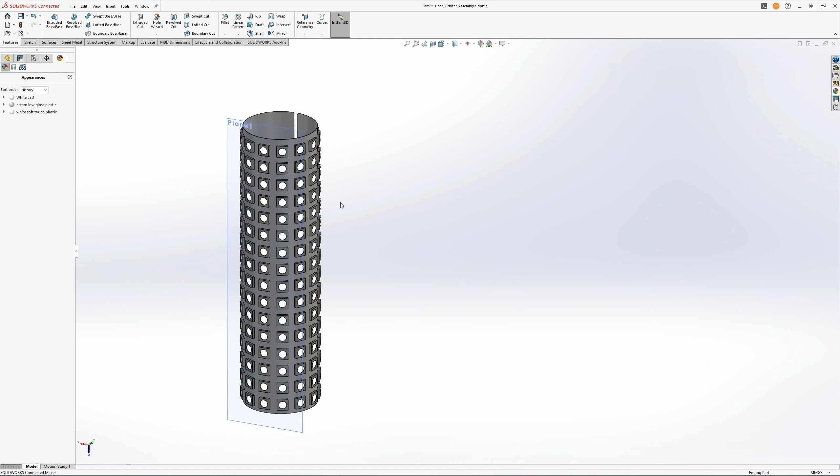And actually I changed my mind about the color of this, because once we make a render, you might be able to see the green through the glass. So I'll just make it soft white instead, which will help with the diffusion. Okay, and save that and click OK. Click OK, and exit isolate. Now we have some LEDs that we can use in our render, and I'll just rename this to our LED pattern panel.

And yeah, as an exercise for you, you can create a little PCB in the bottom here that has the flame LED. I'll do that now, and then we'll have a look in the render how that looks like.

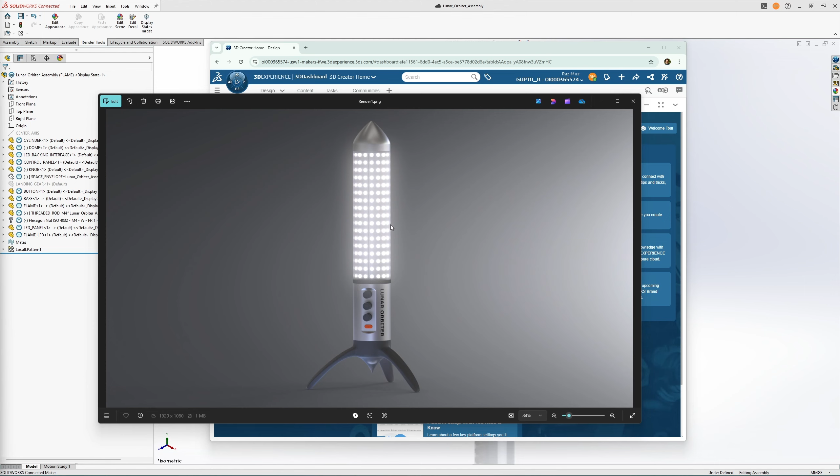So if you have a SolidWorks Maker license or SolidWorks Premium license, you also have SolidWorks Visualize included. And SolidWorks Visualize can make really nice renders such as this, which are really useful for presenting your product. So we'll have a quick look at how to prepare for doing it, and then in the next video we'll have a look at how to actually do the renders.

So if you go onto your 3D Experience platform, just go up here in Apps, and you can scroll down, and you'll find Visualize down here. You can also access it by just writing up here, Visualize, and it'll come up as an application. So when you launch it, you might have an error just like me. I was not able to launch 3D Experience for some reason. I'm not sure why, but we can still use it by just making our project local for the render only.

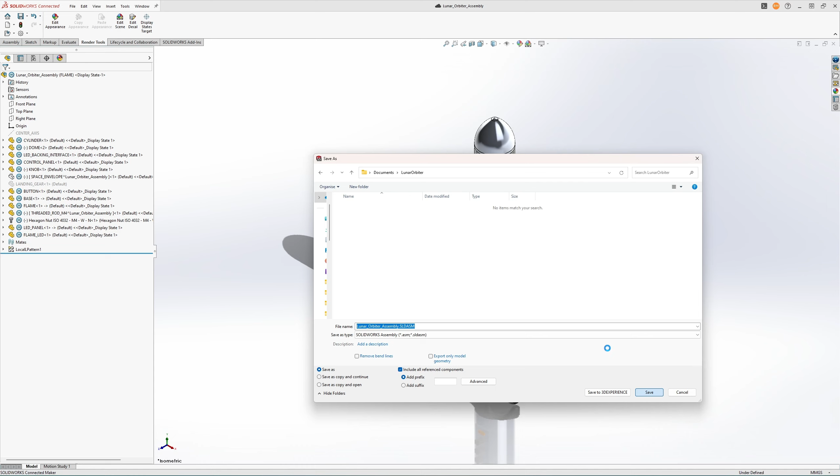So I'll show you how to do that real quick. So we'll just save a local copy that we can then open up in SolidWorks Visualize. So just click Save as New. And this is fine, we'll just use it temporarily. And we'll save it here. And then just click here, include all referenced components, because then it'll save the whole package to this folder. I'll save that. And then when you go back to Visualize and click Open, you should have something like SolidWorks assemblies over here. That'll make it easy to find your assembly. And just click Open.

And so this is just asking you, do you want to include some of the things that are within the SolidWorks file, such as the environment, background lights and stuff, and just click OK, because we can change it later. And there you have it. So that's the model. And in the next video, we'll have a look at how to set all of this up.